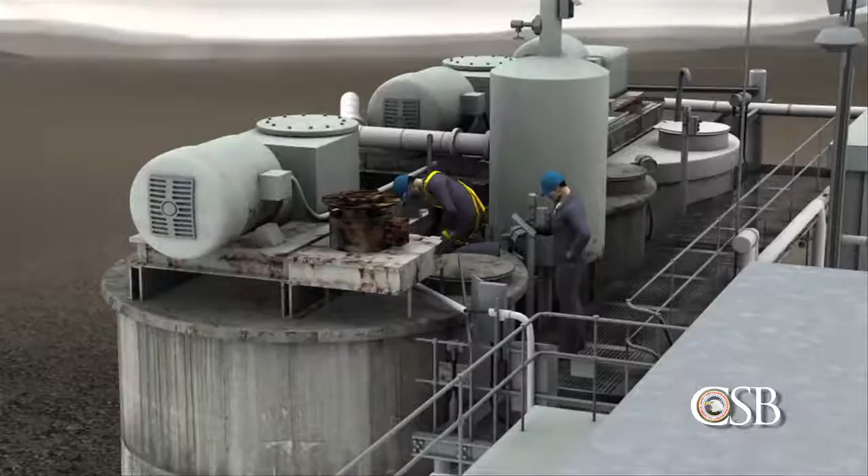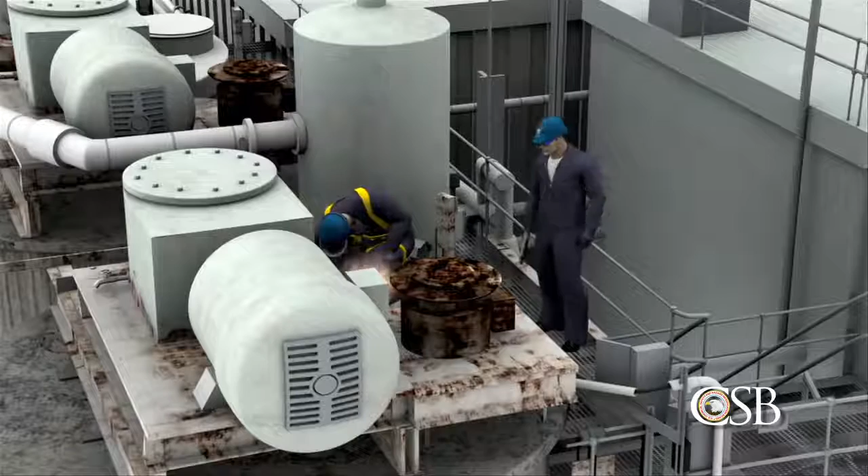On November 9, 2010, a powerful explosion shook the DuPont chemical manufacturing plant in Tonawanda, New York, a suburb of Buffalo. A contract welder was performing maintenance work on a tank that, unknown to him, contained flammable gas. The explosion blew the top off the tank, throwing the welder to the ground and killing him instantly. A second contract worker was burned.

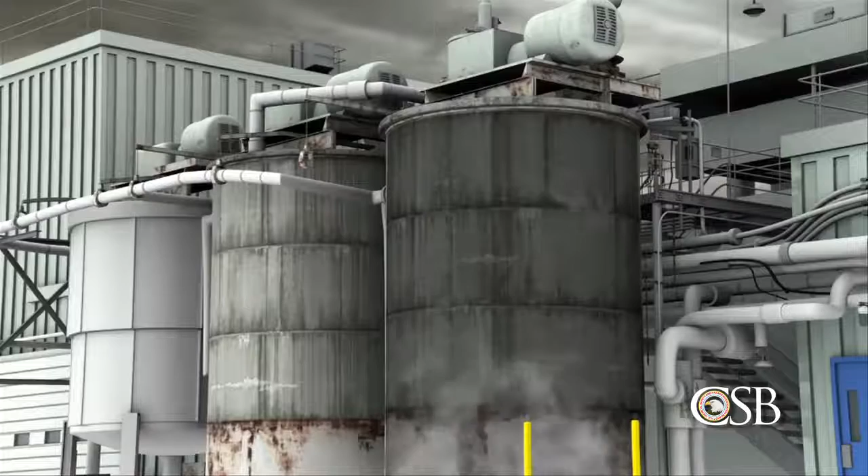The tragic explosion at the DuPont facility exposed weaknesses in how process hazards were analyzed and controlled. The result was the death of a welder in a preventable hot work accident. Hot work accidents occur when workers are welding, cutting, or grinding near flammable vapor, and were the focus of a 2010 CSB safety bulletin. Deficiencies in the safety management of hot work were among the causes of the tragedy at DuPont.

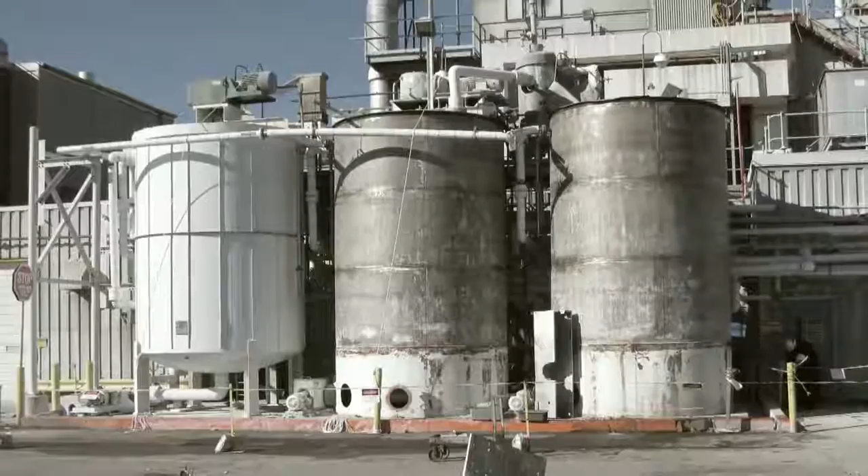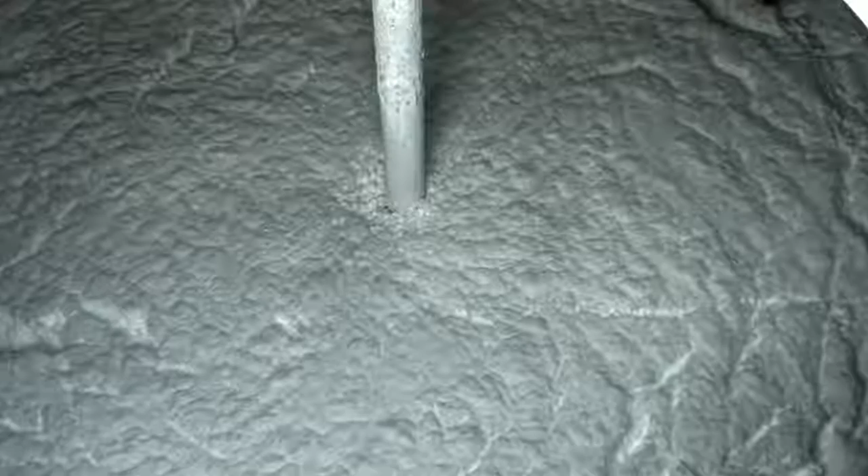DuPont's Tonawanda facility manufactures a polymer known as Tedlar, used in solar panels, and Corian for use in countertops. The process of producing Tedlar began with a chemical reaction to convert flammable vinyl fluoride gas into a slurry of polyvinyl fluoride polymer, or PVF, in water. The PVF slurry then passed through separators.

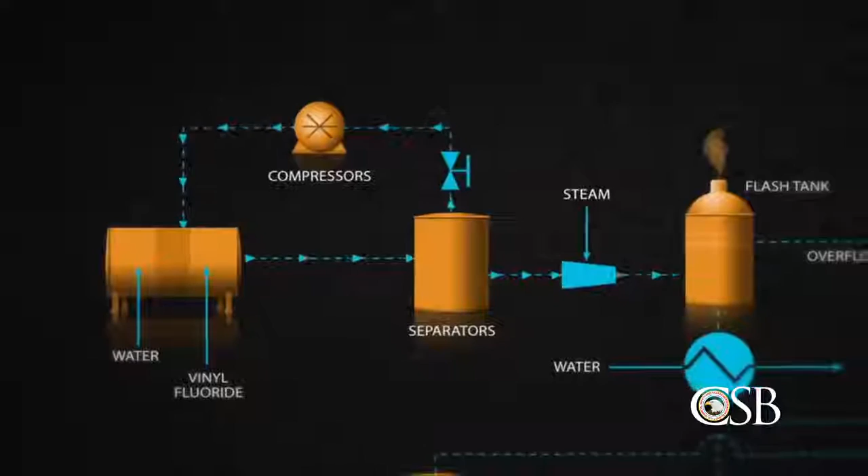Compressors recycled unreacted vinyl fluoride gas into the process, while a small flash tank released residual vinyl fluoride into the atmosphere. Finally, the slurry was transferred to one of 3 insulated holding tanks, usually tank number 3. Tanks 1 and 2 were reserved for slurry overflow. Tank 1 normally remained empty.

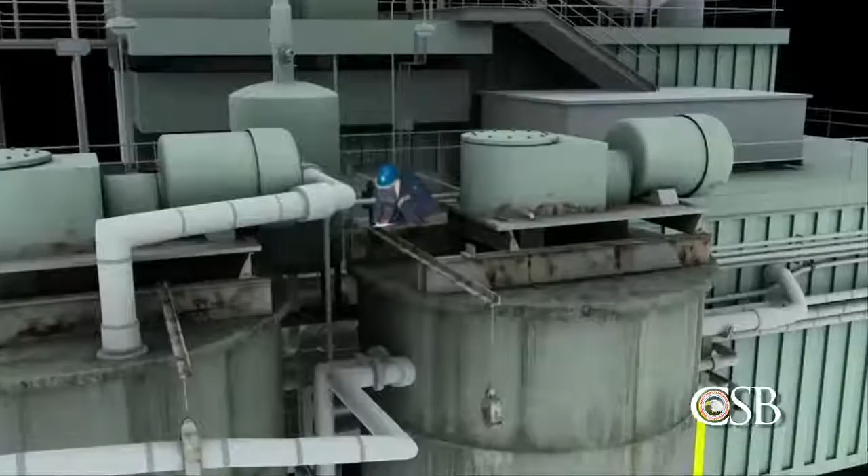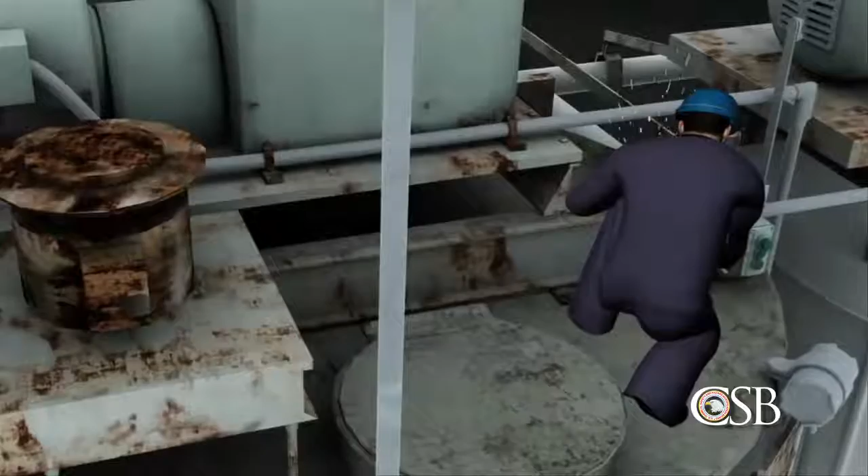On October 22, 2010, the Tedlar process underwent a planned shutdown, during which workers removed the asbestos insulation on tanks 1 and 2. Removing the insulation revealed that the agitator supports for the tanks were heavily corroded. DuPont directed contractors to repair the supports, which would involve welding and grinding on tanks 1 and 2. The hot work on tank 2 occurred during the shutdown without incident, but the repairs on tank 1 were delayed while parts were ordered. DuPont personnel determined that it would be safe to perform hot work on tank 1 after the restart.

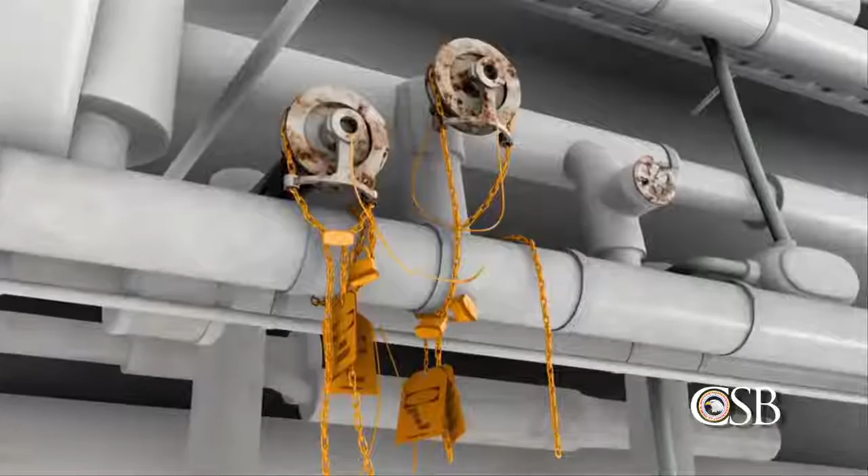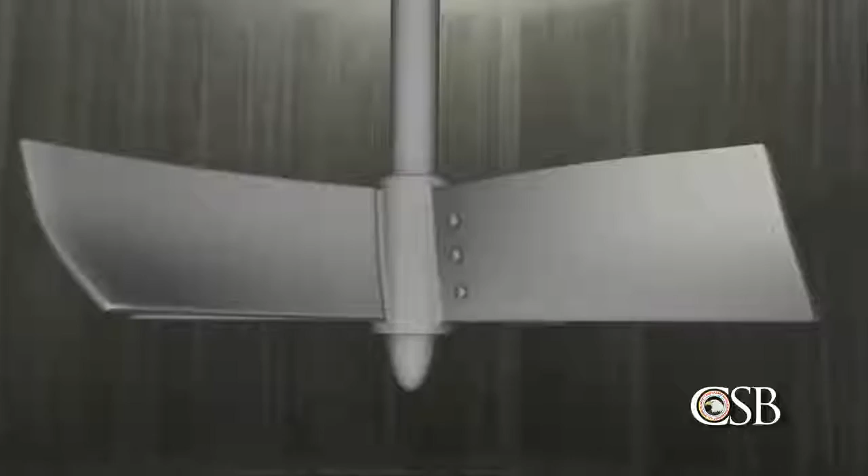On November 7th, DuPont operators locked all 5 valves leading to and from tank 1 in the closed position in order to stop potential slurry flow. The tank's agitator motor was also locked out. However, DuPont personnel did not block the flow of gas inside the overhead piping, or overflow line, that connected the vapor space of all 3 tanks. They mistakenly believed that flammable vinyl fluoride gas could not reach any of the slurry tanks.

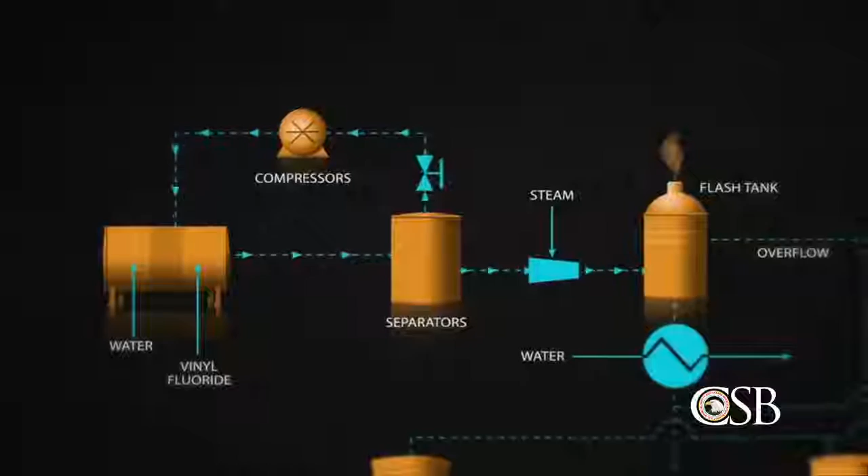But the CSB investigation found that even in normal operations, vinyl fluoride was not completely removed from the slurry and was always present in the slurry tanks in varying amounts. When the process restarted on November 6th, the flammable gas was able to travel from tanks 2 and 3 through the open overflow line into tank 1.

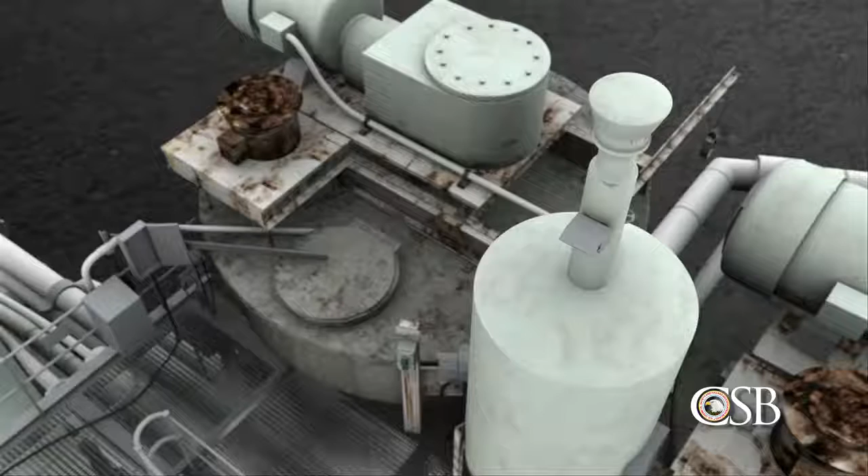On the morning of November 9th, a DuPont technician tested the atmosphere above tank 1, where welding would later take place. There were also 2 continuous air monitors in the vicinity. No flammable gas was detected, and the hot work was cleared to begin. But no testing was done to measure or monitor the atmosphere inside the tanks, where, unknown to the contractors, the flammable gas was at dangerous levels.

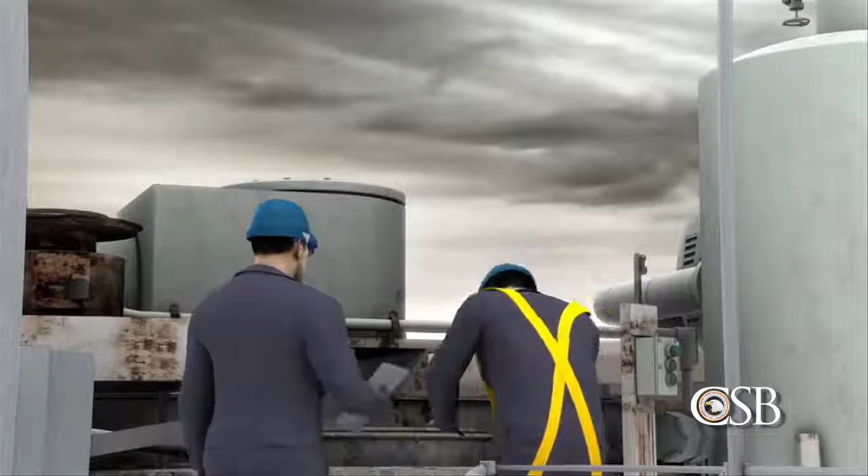Around 9 a.m., 2 contract workers began welding and grinding on tank 1. The welder connected his safety harness to the tank's agitator support and worked on top of the tank as the foreman looked on from the nearby catwalk. At approximately 10:30 a.m., the welder was repairing corroded portions of the agitator support beams directly above the flammable gas.

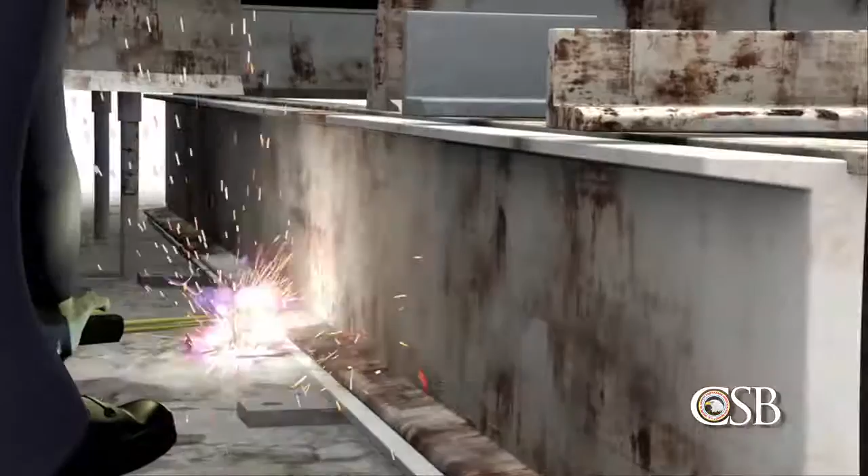A hole around the agitator shaft may have provided a pathway for ignition. Welding sparks could fall into the tank, even as flammable gas might drift upward toward the sparks. The ignition of the vinyl fluoride caused a powerful explosion.

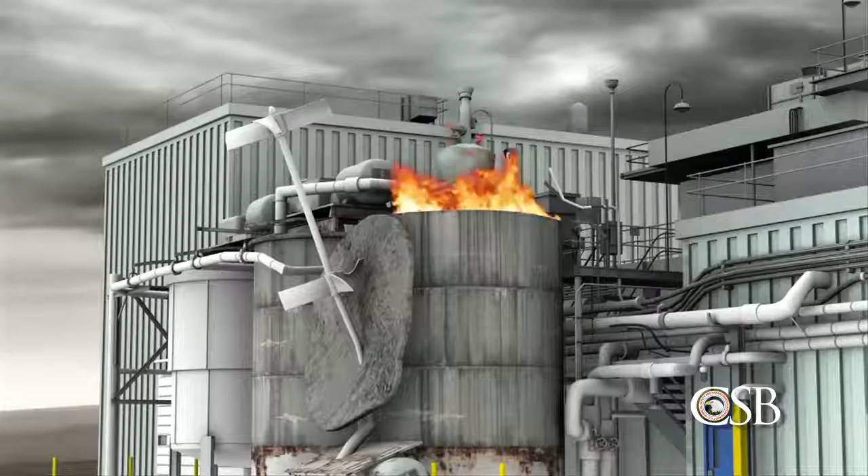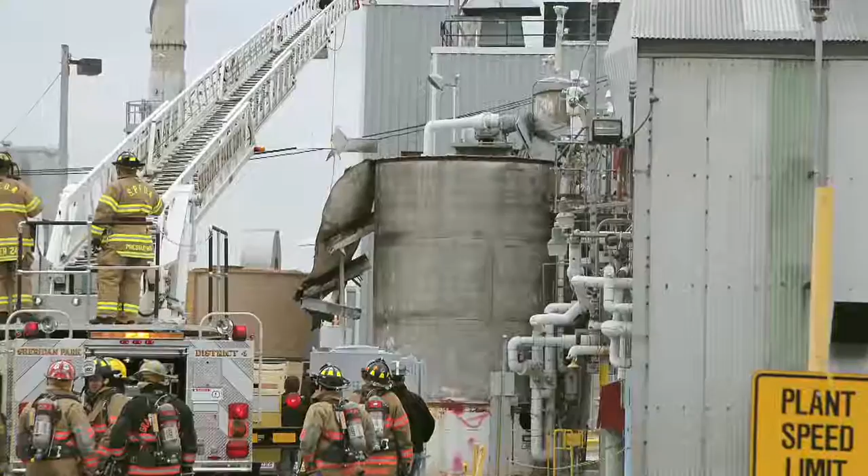The force of the blast blew the top of the tank almost completely off. A flash fire erupted that consumed the flammable gas and quickly burned out. The welder was thrown to the ground, killed instantly from blunt force trauma. The foreman's face and arms were burned.

Mark Wingard was a member of the CSB team that investigated the accident at DuPont. Had DuPont technicians tested Tank 1 for a flammable atmosphere, they would have known that any hot work presented a serious explosion hazard. But plant engineers did not realize that significant amounts of flammable gas could be present in the slurry tanks, and the testing was never done.

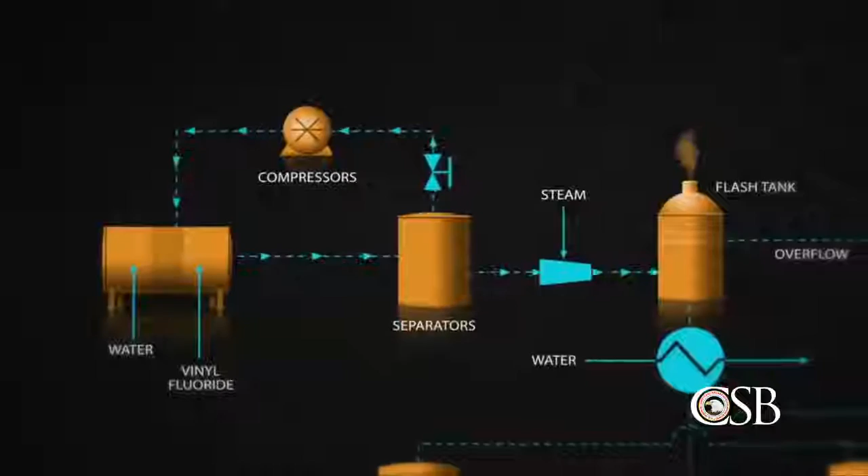DuPont regarded most of the Tedlar production process as covered under the OSHA Standard for Process Safety Management, or PSM, and therefore subject to stricter operating and maintenance requirements. But DuPont personnel did not include the slurry tanks in the facility's PSM program. In a 2009 process hazard analysis, DuPont erroneously concluded that flammable vinyl fluoride gas could never reach the tanks in dangerous quantities.

We found that the contractors did obtain hot work permits for welding on Tank 1, but those permits were authorized by DuPont employees who were unfamiliar with the specific hazards of the process, and the permits did not require testing the atmosphere inside the tanks. Two additional factors may have contributed to the tragedy.

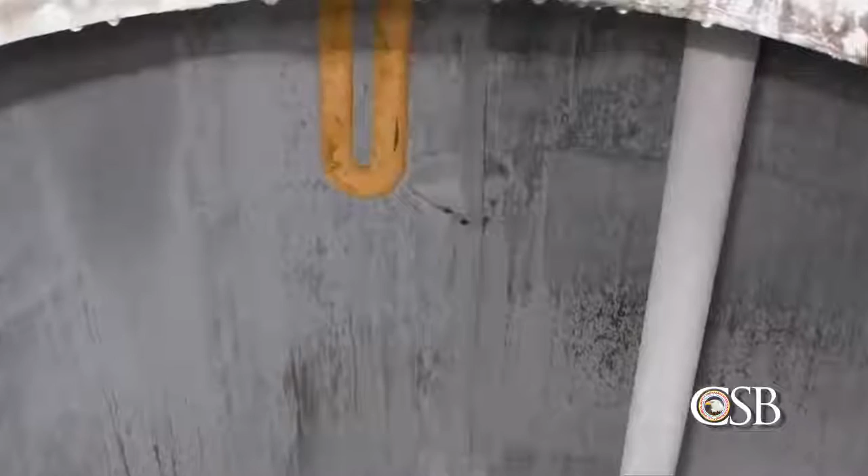Prior to the explosion, DuPont personnel had discovered that slurry tank number 2 had a hole in a liquid trap, which was designed to prevent the flow of gas from the flash tank. Without a liquid seal in the trap, there was an additional pathway for vinyl fluoride gas to flow into the tanks. However, this hazard went unrecognized, and DuPont engineers concluded that it would be safe to return the tank to service. No formal management of change review was conducted.

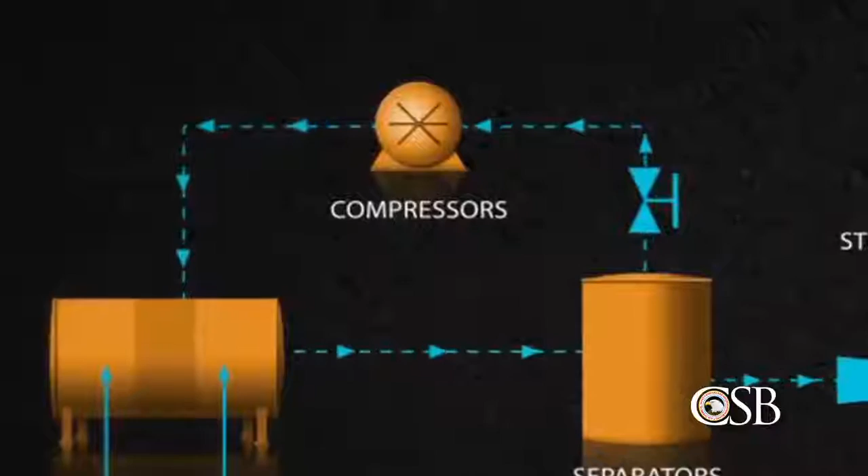Further adding to the danger, on November 8th, there was a malfunction in a compressor used to strip vinyl fluoride gas from the PVF slurry. As a result, the slurry contained more than the normal amount of vinyl fluoride. Once again, DuPont personnel did not formally analyze the safety impact of continuing to operate with a malfunctioning compressor.

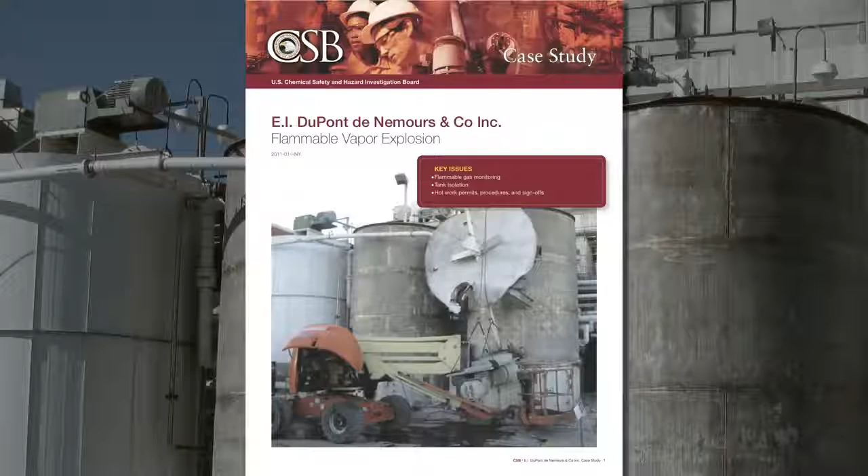In its final report, the CSB recommended that DuPont revise its corporate policies to require atmospheric monitoring inside tanks before and during any hot work. And the board recommended that DuPont require all process piping, including vent lines on tanks, to be positively isolated before authorizing any hot work.

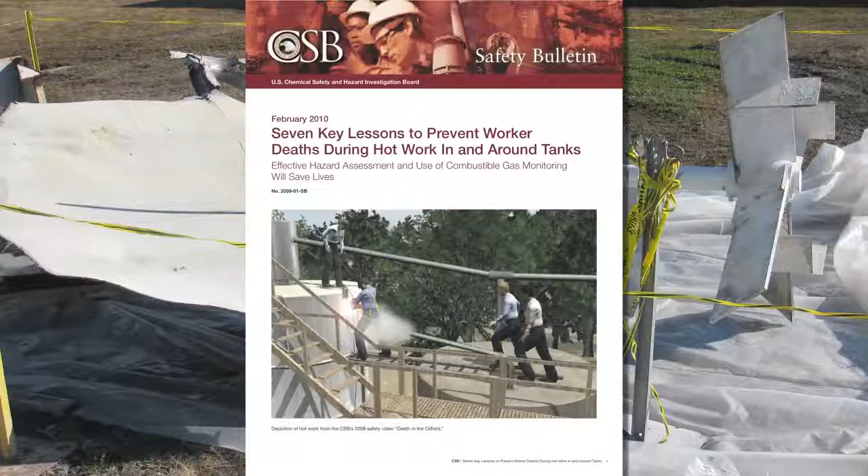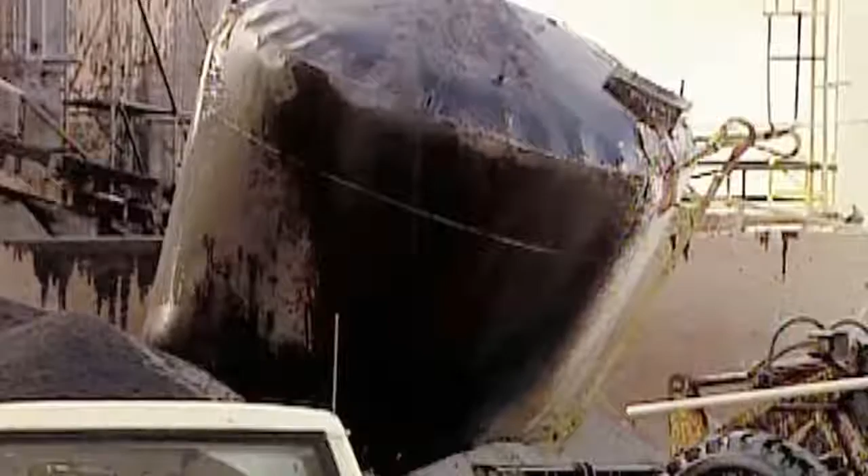In our 2010 Hot Work Bulletin, the CSB identified 11 accidents similar to the one at DuPont. All involved hot work on tanks that ignited flammable gas inside. In all cases, the CSB found that there was not an adequate system in place for monitoring the atmosphere for flammable vapor where hot work was to occur.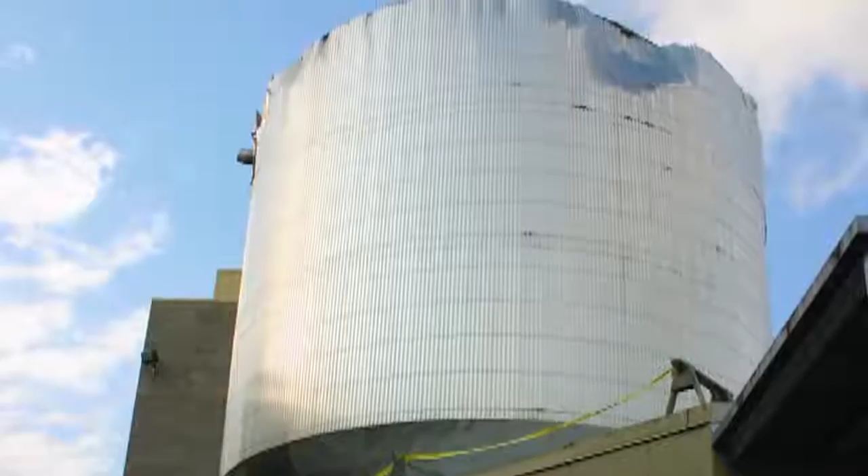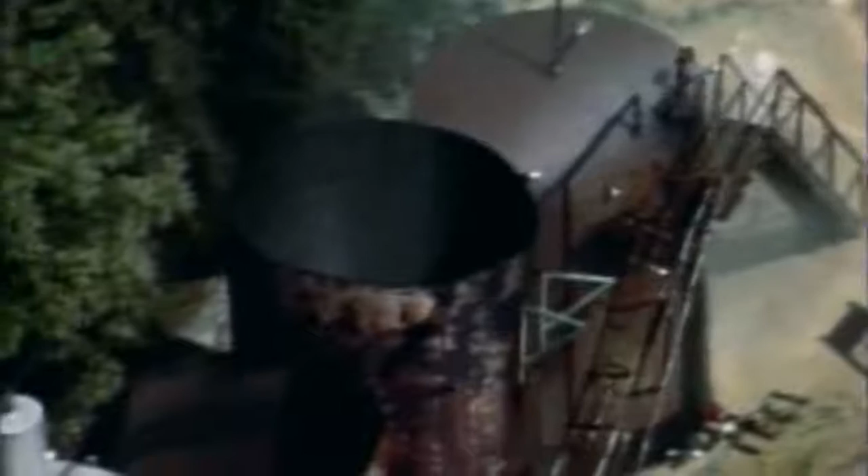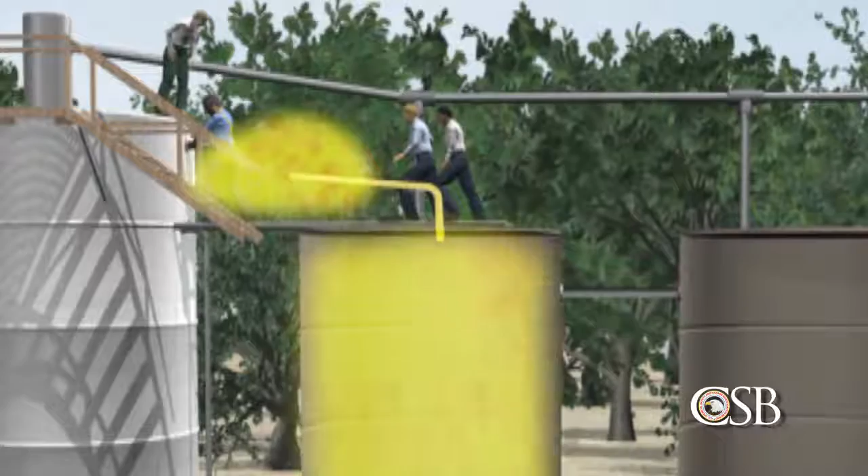For example, in June 2006, 3 contractors were killed and another seriously injured in an explosion at the Partridge Raleigh oil field in Raleigh, Mississippi. The contractors were welding on one of 4 storage tanks when welding sparks ignited flammable vapor flowing from an adjacent tank. As was the case at DuPont, no monitoring was performed to test for flammable gas inside the tank, and piping to the adjacent tank was not isolated.

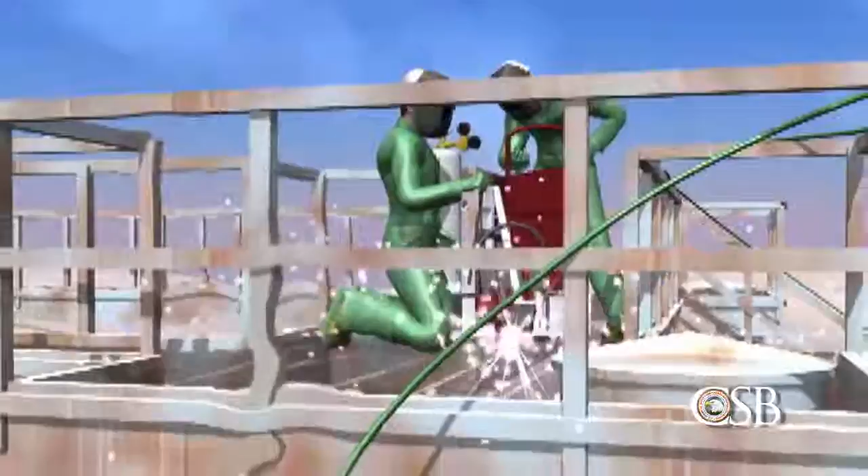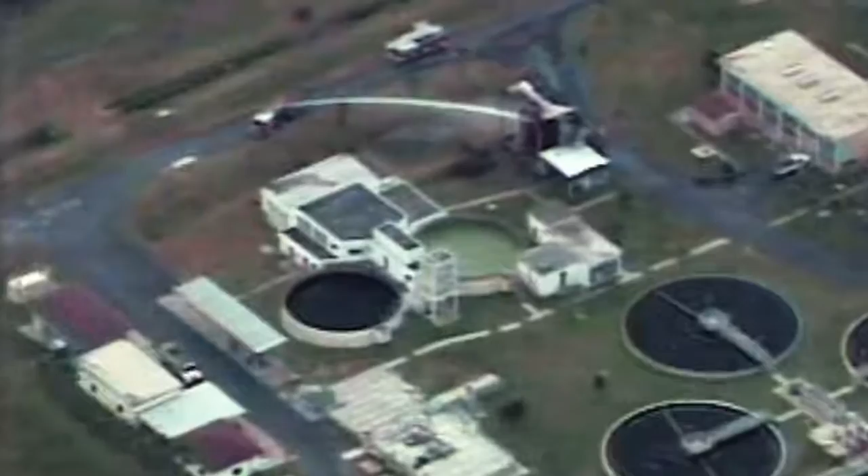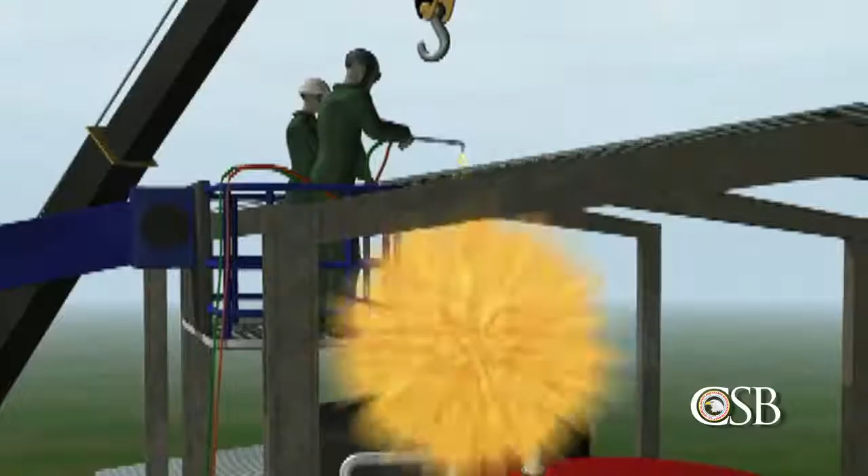In July 2001, an explosion killed 1 contract worker and injured 8 others when welding sparks ignited flammable hydrocarbon vapors in a large sulfuric acid storage tank at Motiva's Delaware City refinery. And in January 2006, 2 workers died and another was seriously injured in an explosion at a municipal wastewater plant in Florida when hot work ignited vapor inside a storage tank of highly flammable methanol. In all of these cases, combustible gas monitoring either was inadequate or wasn't performed at all.

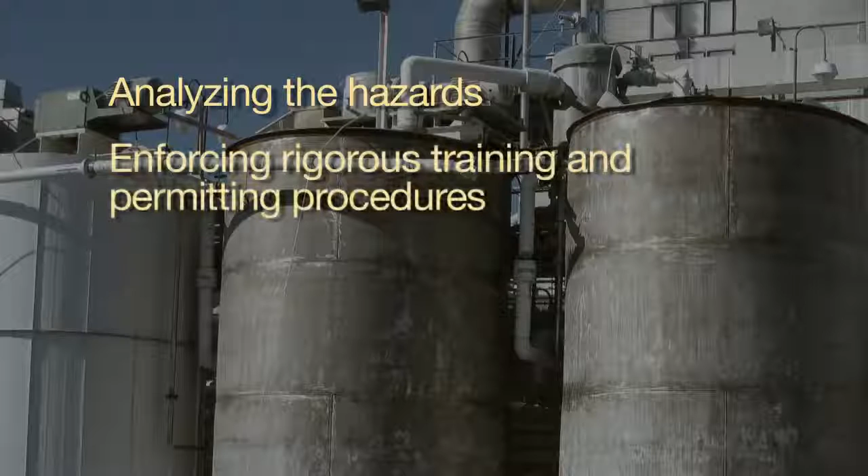In its 2010 safety bulletin, the CSB said companies can prevent hot work accidents by analyzing the hazards, enforcing rigorous training and permitting procedures, constantly monitoring the atmosphere for flammables, and avoiding hot work in favor of non-spark producing methods whenever possible. Hot work is often seen as a routine activity, but it can prove deadly if fire and explosion hazards are overlooked.